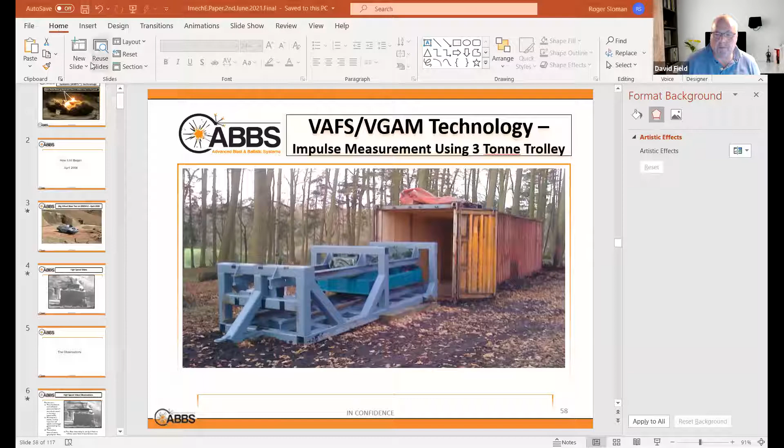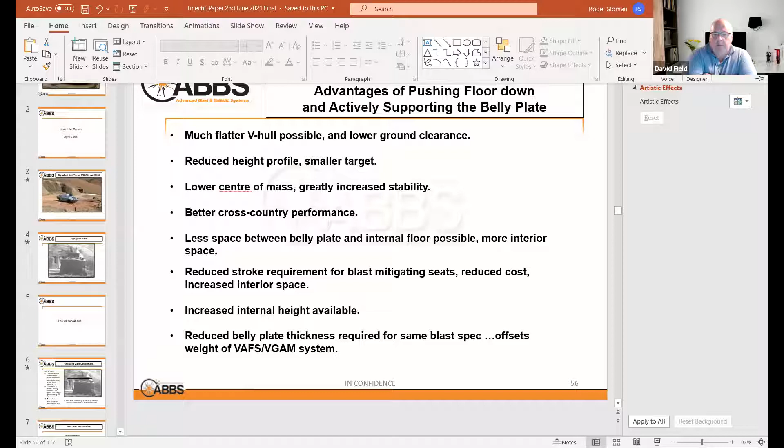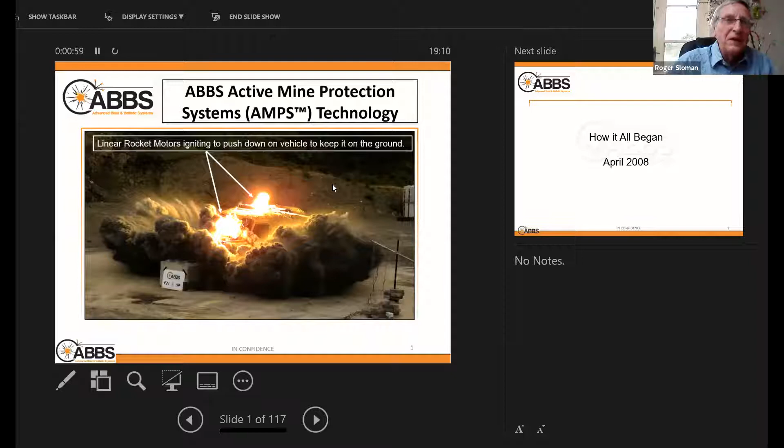This will be about five milliseconds into the event, and the motors are just beginning to fire up to push down on the vehicle. That's a pretty amazing shot with the clarity you get, probably 2000 frames per second, I think.

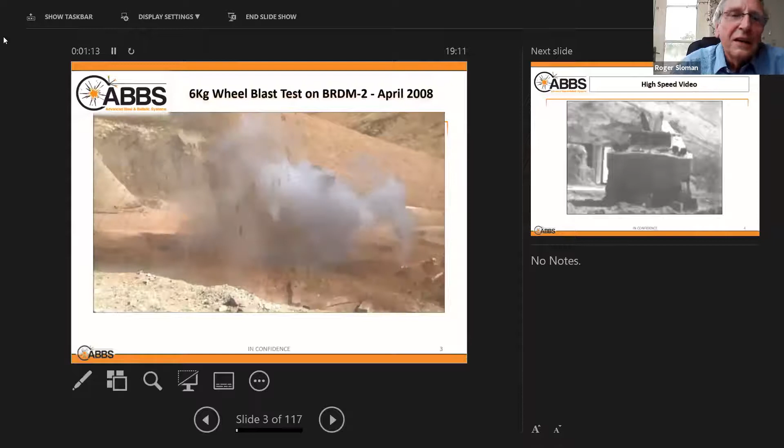So it all began in April 2008 when I was at blast tests on an armoured vehicle, which I can share again. No, they don't want to let me. I'll go back one, and run it again so you can see it. That was the first time I'd ever organised a blast test and seen one.

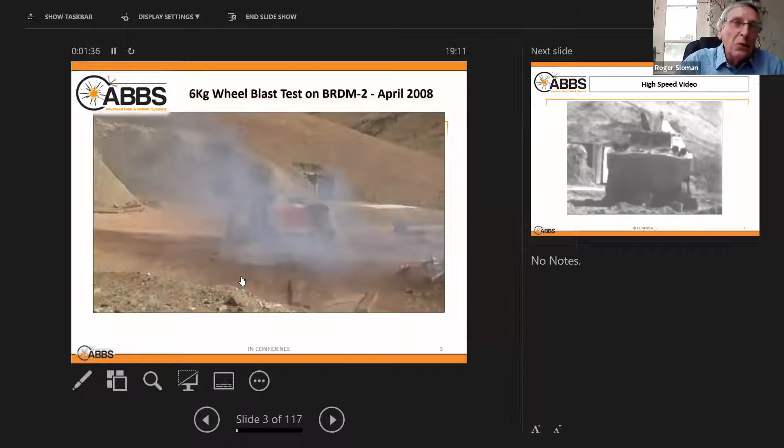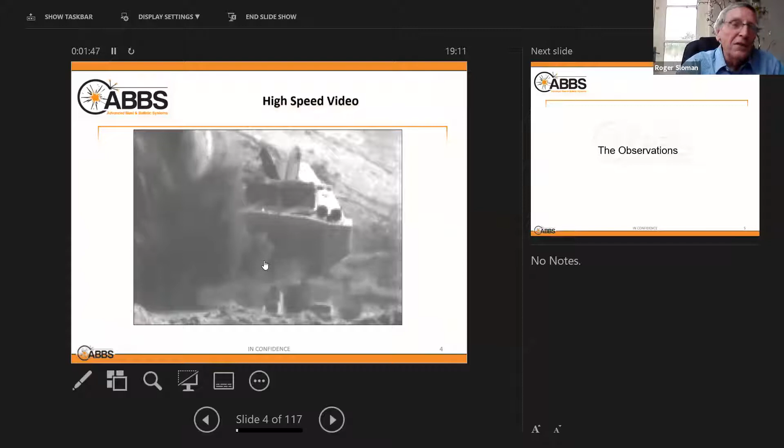When you look at the high-speed video, you can see that the mine goes off and the vehicle doesn't move for a certain period of time. We see that again in the next slide. You see the shock wave from the det cord leading to the mine, and the mine go over the vehicle within a millisecond or two, and the vehicle doesn't move at all.

When I asked the so-called experts in the company I was working for what the cause of the vehicle being blown into the air was, they all said, oh it's the shockwave and reflected pressure, because that's a big peak in the force time curve.

But clearly you see, I'll try and show it again - it's slow in responding for some reason - see the shockwave pass over the vehicle, it definitely hasn't moved. So it cannot be that the shockwave and reflected pressure, which is a big peak in the force time curve, is actually lifting the vehicle.

It's something else. And the obvious conclusion is it comes from the gas generated by the mine and the soil that's thrown up against the vehicle. So I thought, well, that 10 milliseconds is plenty of time to initiate some form of countermeasure.

When I looked at the NATO blast test standards at the time, this was already well known. The section here - I don't know if you can see my cursor, can you? No, you can't, it's annoying.

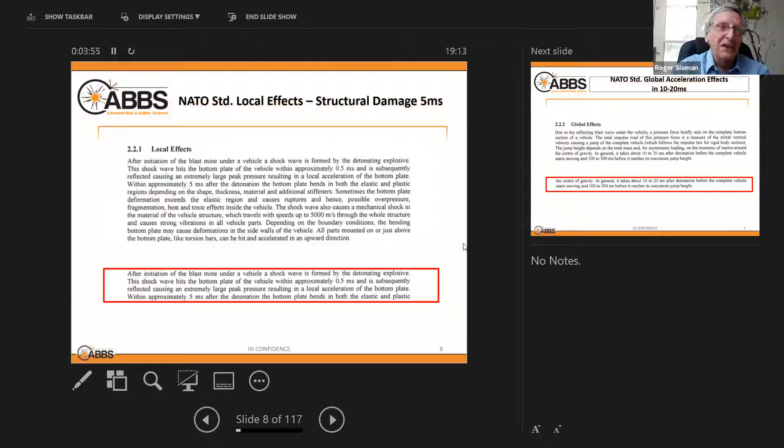All the damage is done in about 5 milliseconds. After that, the gas has gone effectively, and the ejecta has stopped being projected—well, hasn't quite stopped, but the main force has gone. So that's the damage to the vehicle.

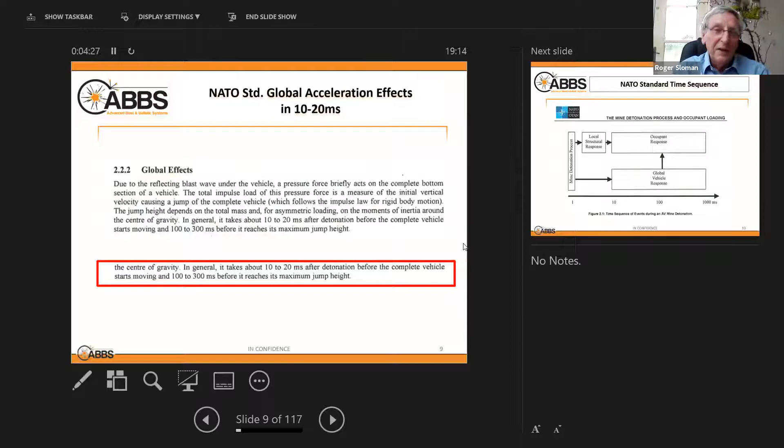Then there's the global acceleration effects, the vehicle being thrown into the air. This red outline, abstracted from the main text, is well recognized: it takes 10 to 20 milliseconds after the mine goes off before the complete vehicle begins to move. That was the observation I made, and I thought it was new, but it wasn't. It was well known, but nobody imagined you could do anything about it.

So this is the sequence of events. The mine goes off, damage is done to the vehicle—this local structural response. Then the global vehicle response starts, the vehicle being thrown into the air at high velocity, a very rapid acceleration from zero to whatever velocity it reaches, which can be 5, 10, 20, even 40 meters per second.

And that creates the occupant response, where the G loadings on the occupants get so severe you get spinal injuries, neck injuries, brain injuries, internal damage, and you can bleed to death. It's not a pleasant scenario. Even if the vehicle isn't penetrated, you can still die or be severely injured from the global acceleration alone.

Understanding what happens is really key to working out what to do about it. Looking at the force-time curve, you've got this initial large peak, the shockwave and reflected pressure that's talked about. Then you've got the forces generated by the gas from the mine and the ejecta being thrown out from the soil. Notice it dribbles along above zero for 20 milliseconds here.

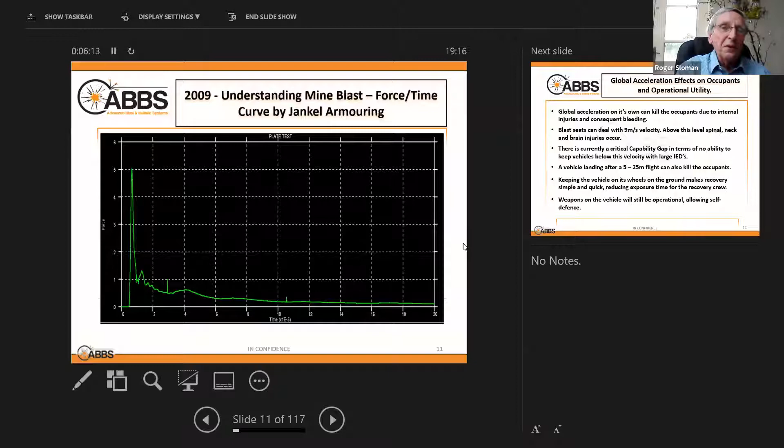In fact that goes on for much, much longer—200, 300 milliseconds at least. That wasn't really recognized when I started looking at this, and it contributes to the total impulse more than people thought. So the global acceleration effects are really important.

They can kill you. Blast seats can only deal with 9 meters per second. This is a critical capability gap—there's no ability to deal with it at the moment in any of the US or NATO armies, or globally indeed.

And it's not just the acceleration upwards—crashing down on the ground is not pleasant either, and that can also severely injure or kill you. In terms of operational utility, keeping the vehicle on its wheels on the ground makes recovery much easier, reducing exposure time for the recovery crew, and the weapons are probably still operational, so you can defend yourself.

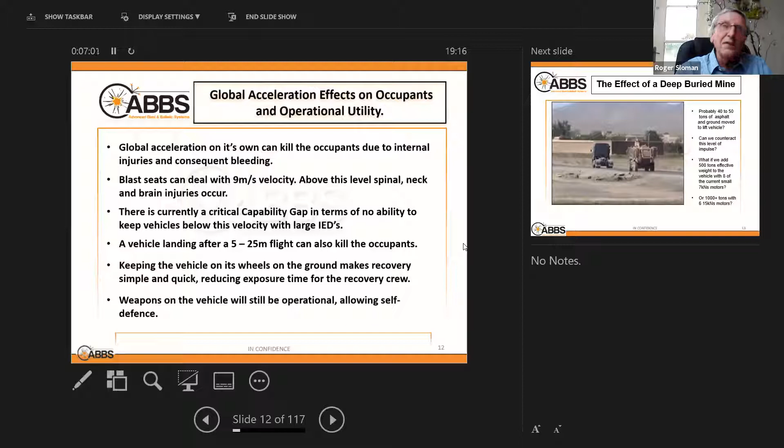This illustrates just what can happen, and it'll run by itself. You've got probably a 15 to 20 ton vehicle there, and it's just thrown aside like a toy. It certainly wouldn't have done the occupants any good. I don't know what the outcome was, but it's a very good example, thanks to the Taliban, of what can happen.

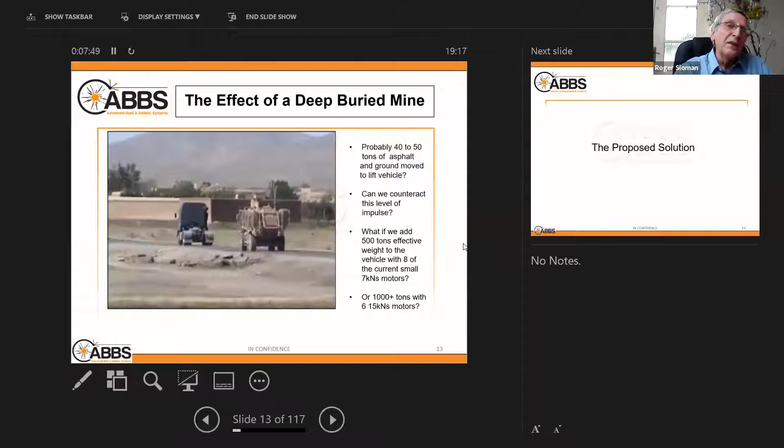So the point is, it looks like there's nothing you can do about that, but we can make that vehicle weigh 500 tons or 1,000 tons, and it certainly would not be thrown in the air like that. There is a potential solution: push down on the vehicle with rocket motors. This is the Vehicle Global Acceleration Mitigation, VGAM.

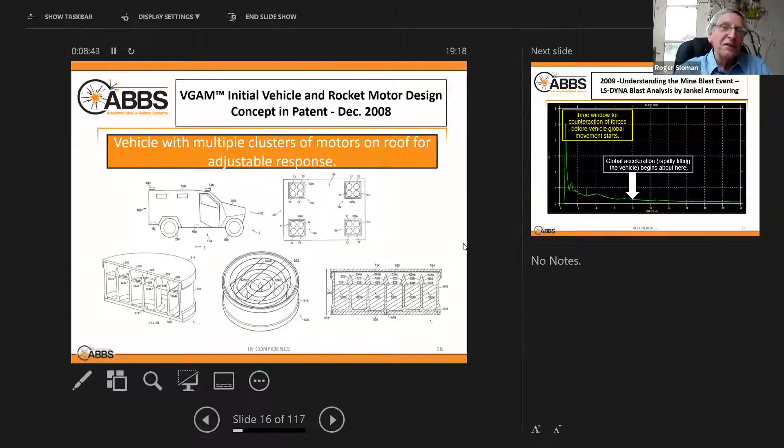The original patent application—these are some of the drawings from it. You see clusters of these motors on the top corners of the vehicle, and this novel rocket motor design, which turned out to be a circular form of the linear rocket motor we ended up with. So yeah, I invented the circular rocket motor. It's quite a shallow bowl with a very large exit area, because you've got to burn a lot of propellant very quickly and get all that gas out through the exit slots—that's what it was designed to do.

This illustrates the time window you have for counteracting the global forces, and that's what you need to do. Thanks to Jankel for that.

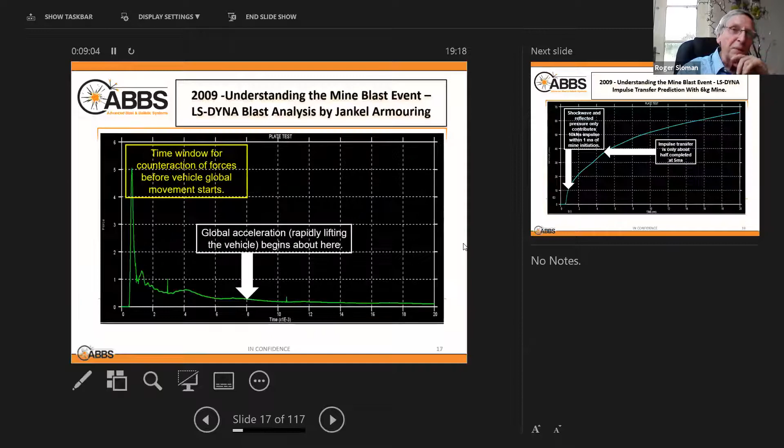Force times time—if you add up all the area under the curve, quite simply, you get the impulse curve. And contrary to what was said in that NATO standard, that the shockwave and reflected pressure drives the vehicle into the air—it doesn't.

It's the total impulse that's transferred over a period of time. Interestingly, at the 1 millisecond time scale, you only get 10 kilonewton seconds delivered, and it's only about half completed by 5 milliseconds.

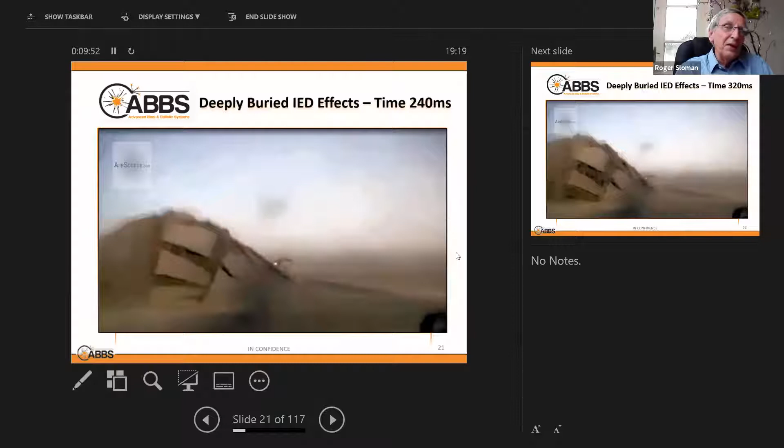This is another example of a deeply buried mine, and you see the effect. There's no gas involved in that, it's just the road surface and the earth being thrown up. This is similar to putting a mine in a culvert underneath a road. You get a very high impulse level generated by this big, massive earth hitting the vehicle, not so much the gas in that case.

So how do you generate huge forces required within 10 milliseconds? There's only two ways of doing it, really in principle only one way: you've got to rapidly accelerate a mass to produce recoil or reaction forces. You could think of electromagnetic devices and rail guns, but forget it, that's not practical for armoured vehicles.

So there's only two ways: ballistic mass ejection, where you explosively accelerate solid or liquid out of a tube or off a surface, or you use a rocket motor and generate gas ejected at high velocity.

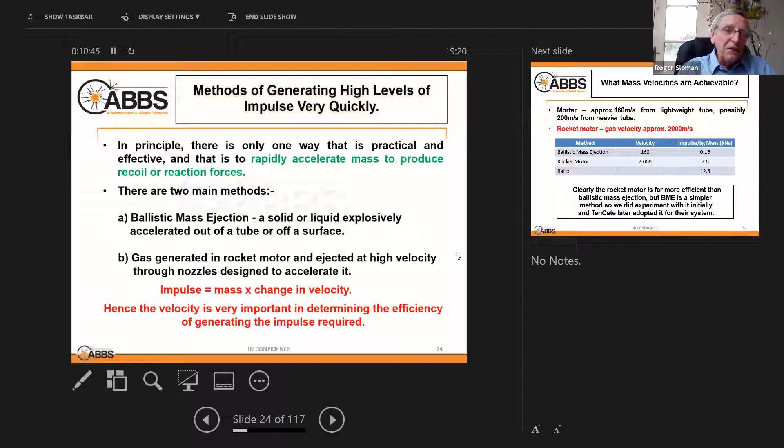Impulse is mass times change in velocity, so velocity is very important in determining the efficiency of making the impulse. For a mortar at 160 meters per second, impulse per kilogram of mass is 0.16 kilonewton seconds. A rocket motor with gas velocity of 2,000 meters per second gives 2 kilonewton seconds. So the ratio is 12.5 times, clearly rocket motors are the way to go.

But ballistic mass ejection initially was simpler. We did experiment with it, and indeed TenCate later adopted it for their system, which is the only competitive system to what we do. So we started by ejecting water from a small steel machined tube.

A kilo of water, 42 grams of propellant. When I measured this, astonishingly, I recorded about 36,000 kilos of thrust load. You note that the motor is ignited by the det cord entering the bottom of the pot.

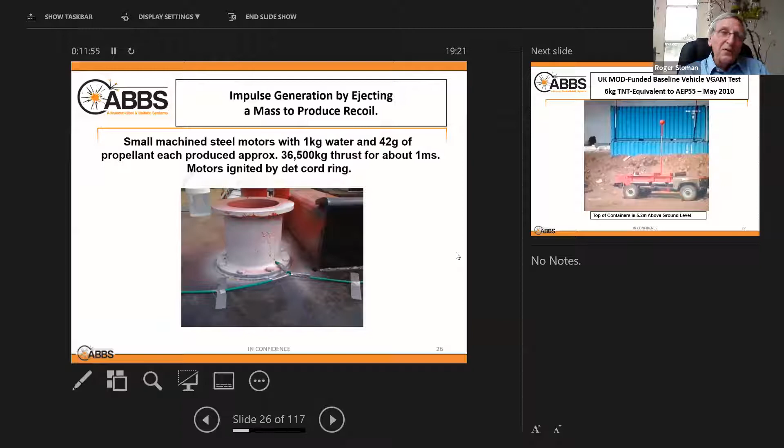And we got some funding. The MOD did not believe that this could work, but they gave me 50,000 to demonstrate it.

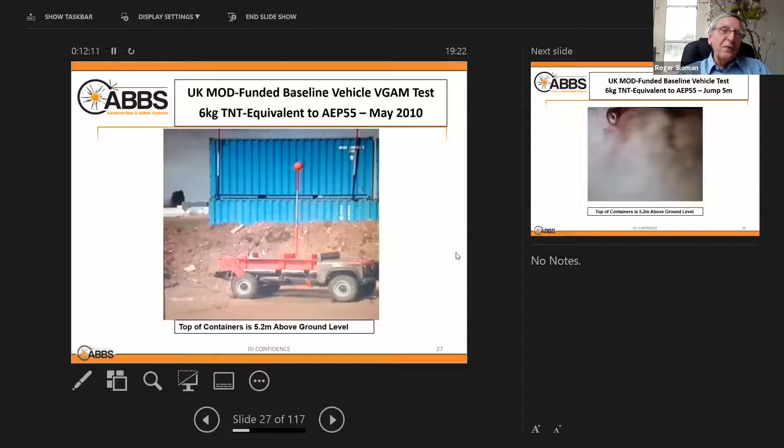This was the baseline test. You note the top of the containers is 5 meters above ground level. This is the baseline test, and that's the result of the baseline test. You still see the top of the container underneath the wheel of the vehicle, about a 5 meter jump of the centre of mass.

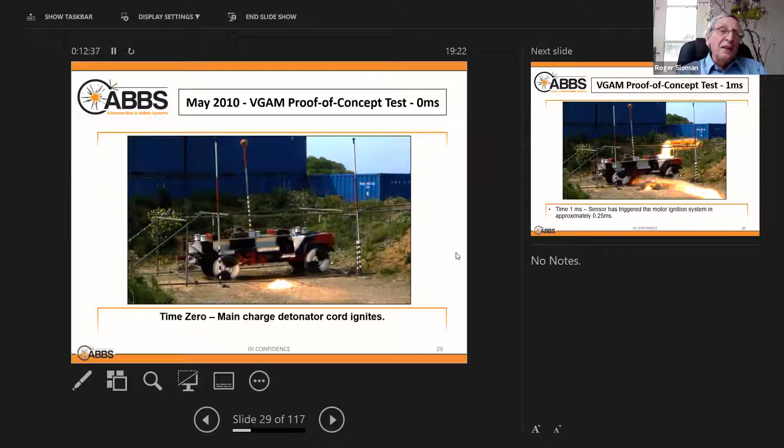Here you can see the setup with the 6 white painted ballistic mass ejection devices, and that's firing up the det cord. The sensors triggered the system at about a quarter millisecond, lighting up the det cord to light up the motors.

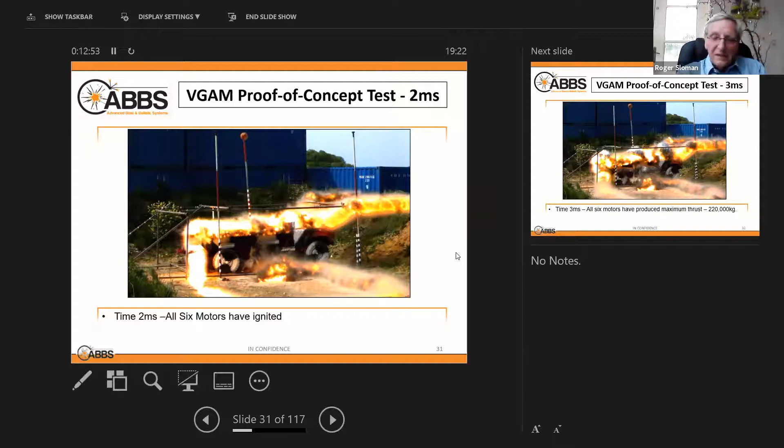And I had 2 ways of doing it, one is reserve, just to make sure that it worked. And here you see the water coming out.

At that point, you've theoretically made that vehicle weigh 220 tons, and you'd expect it to stay on the ground. However, it didn't, because we've still got about a 2 meter jump height. It's well reduced from 5 meters, so a 60% reduction, but we still got a jump.

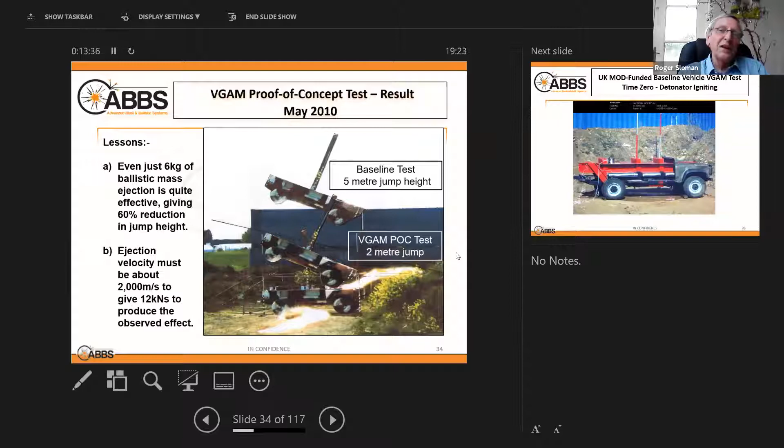The exit velocity of that water, or its initial acceleration up the motors, I think must have been 2,000 meters per second to give 12 kilonewton seconds to produce that observed effect. But the point is that it still jumped. The reason is that when you deliver all the impulse instantaneously at the start, you miss the impulse curve that follows. That's the rationale for that.

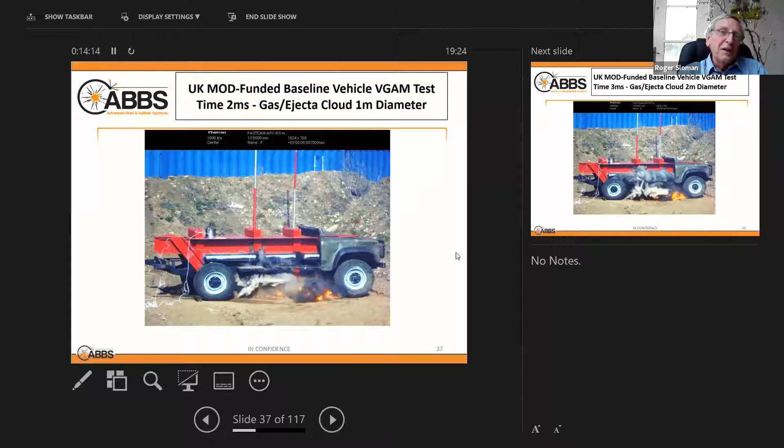Some ejecta. Now, if I just run that back the other way, you can see the intersection of the red and the silver on the column in the center of the vehicle. If you watch that, it starts moving at 2-3 milliseconds.

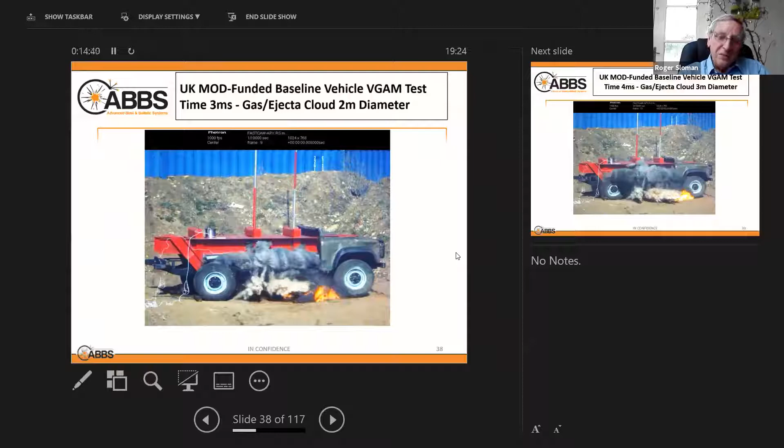And in fact, if you also look at the rear end of the vehicle, the red beams, you see they flip down. So clearly the vehicle is bending in the middle, but if you look at the rear wheel, you can still see that the ejecta is just coming around the edges of the wheel, it's not going under the wheel, the wheel is still on the ground. It's really quite an interesting observation. You can see that at 5 milliseconds, the gas ejecta has got to the end of the vehicle.

The damage process is complete. Vehicle still on the ground.

That's really quite interesting. So the observations from that, it takes 5 milliseconds to get to the end of the vehicle, so about 1 meter per millisecond.

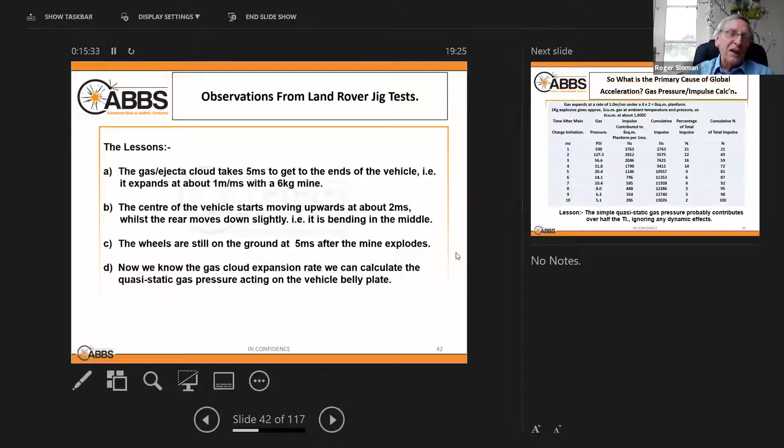The gas cloud expands, center of the vehicle moves up, bends, and we now know the gas cloud expansion rate, so we can calculate the quasi-static gas pressure acting on the vehicle belly plate underneath the vehicle.

I'm not a mathematician, so I do it very simply by taking 1 millisecond steps, a simplistic analysis of the quasi-static gas pressure underneath the vehicle. It drops very rapidly from 500 psi at 1 millisecond to 127 at 2, 56 at 3, right down to 10 psi at 7 milliseconds.

So really it's all done pretty much in 4 or 5 milliseconds. 80% is done in 5 milliseconds. And you can calculate the impulse and you get to a total of 13 kilonewton seconds.

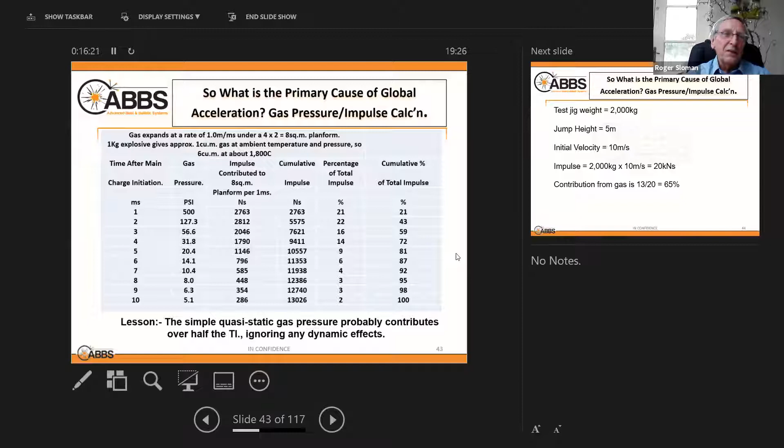So that's quite interesting. When you think what the primary cause of the acceleration is, you've got the jig weight, the jump height, the initial velocity to get to that height, 5 meters for the impulse, and the contribution of the gas. 65% of the contribution to impulse is from the gas, just the quasi-static pressure of the gas.

When I ran that past people I visited, like British Aerospace Systems, GDLS, Renault, the TNO research organisation in Holland, I asked them what their view was of the ratio of the effect. They came up with 60% for the gas as well, so that was quite pleasing.

There's a frequent perception that holding the vehicle down against a blast will result in more damage. Complete load of rubbish. The evidence from the two tests, the baseline and the VGAM one, shows there's very little difference between the deformation of the belly plate in those two.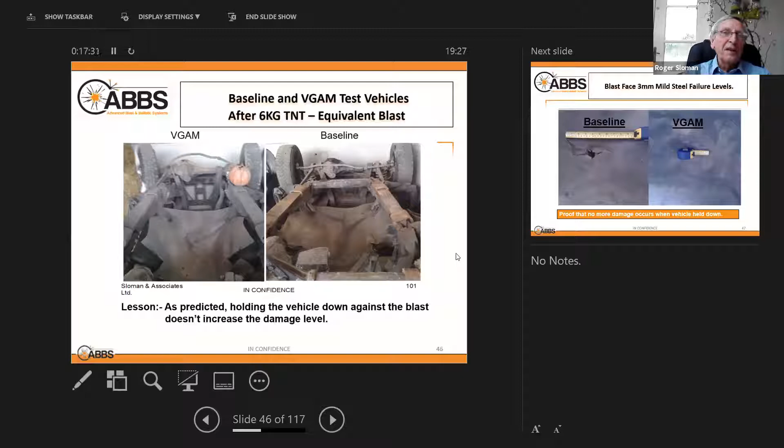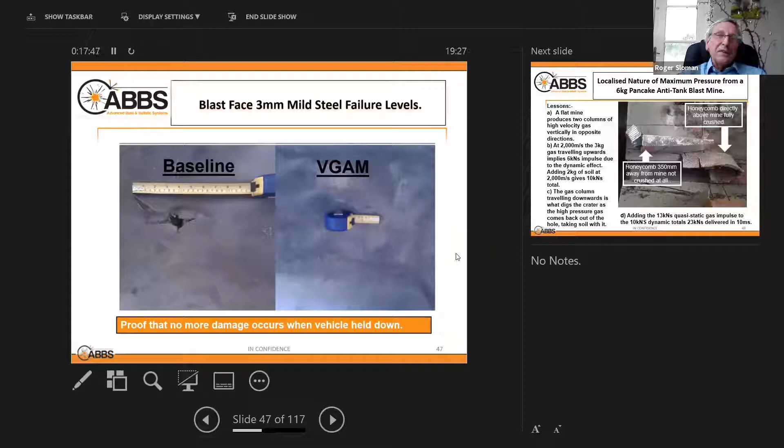In fact, there was a split in the baseline one. There was only 3mm steel on the sandwich section I used underneath, whereas the VGAM one has just got a tiny crack. So that was quite interesting that it worked like that.

The other thing is the honeycomb within the sandwich structure, directly above the mine, is completely crushed. A foot away, it's not crushed at all, illustrating beautifully that with a flat anti-tank mine, you get 2 columns of gas, high velocity gas, going vertically in opposite directions.

And you think about the impulse that's generating, 3 kilos going up, 2,000 meters per second, 6 kilonewton seconds. Due to the dynamic effect, add a bit of soil and it gives you 10 kilonewton seconds in total, which happens to be what the LS-DYNA analysis said as well.

So that's simple logic. Whether it's right or not, I'm not quite sure, but it seems to be. The gas going down digs the crater out, so high pressure gas comes out.

So adding the quasi-static gas pressure, quasi-static impulse, you get 23 kilonewton seconds, which is what was required to push that vehicle 5 meters in the air.

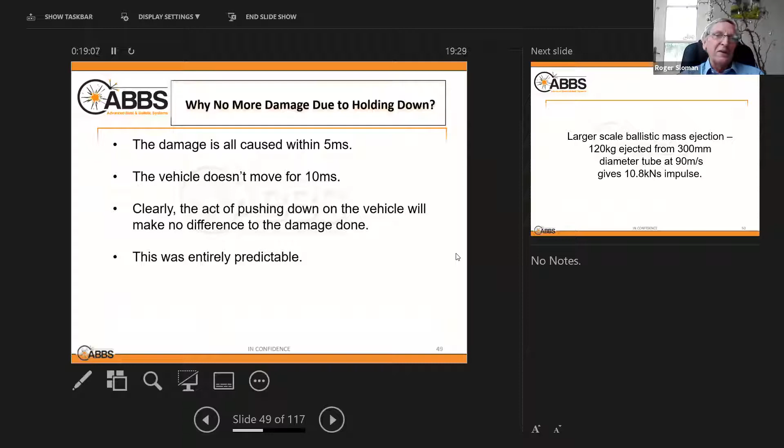So why is no more damage done by holding down? Because it's all caused within 5 milliseconds. The vehicle doesn't move for 10, so clearly it's not going to do any more damage. And that was army people who suggested it might do more damage quite frequently.

So we did then look at large scale ballistic mass ejection. We ended up with 120 kilos of mass being ejected from a foot diameter tube at 90 meters per second, giving nearly 11 kilonewton seconds worth of impulse.

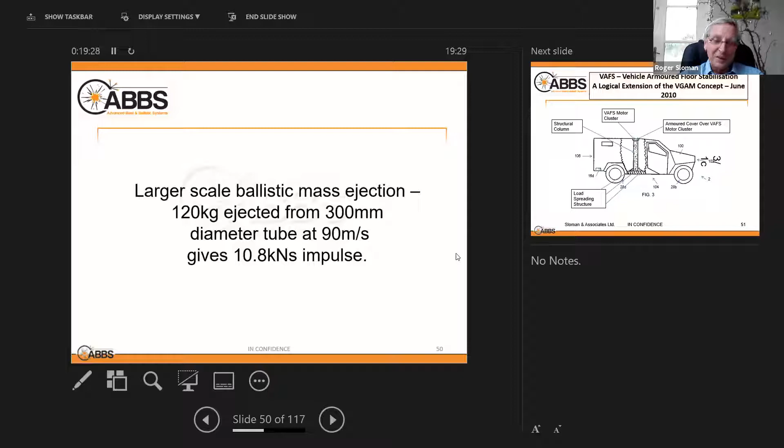It's worth just looking at how we did that. There's another patent application that went in using a column to bridge between the roof and the floor, put motors inside there, and then you're pushing down on the floor as well, which stabilizes the floor against the mine blast.

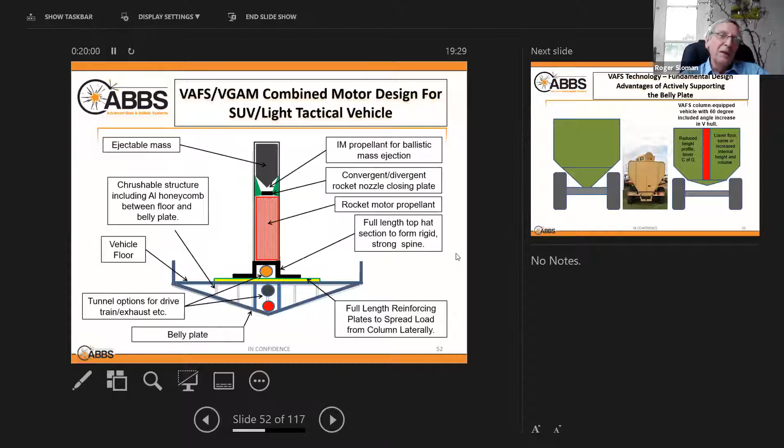So I came up with various designs incorporating both the ballistic mass ejection and the rocket motor within the column. That would all work beautifully in principle, and that would allow you to get away from the horrible V-shaped hulls.

When I drew that first thing on the left, I thought I'd made the angle too steep, and then the Foxhound next door to it was even steeper. If you have a column in the middle to push down, you could make it a lot flatter, a lot more central, and a lot more room inside.

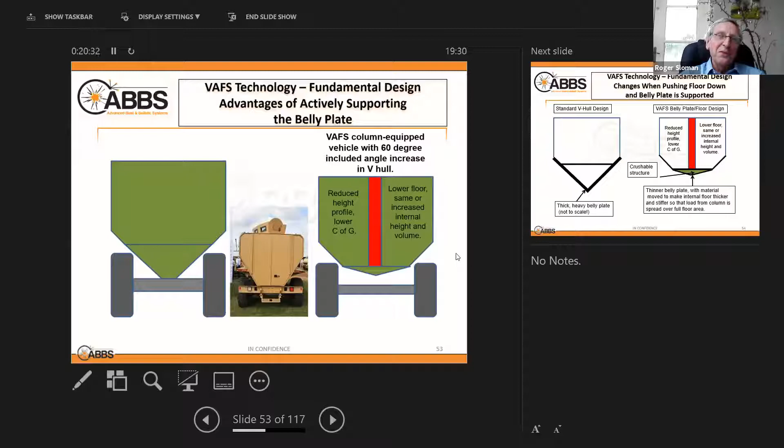And that's just repeating the same thing really. I came up with designs where you could put the exit holes of columns in the roof of the vehicle, so you could put tubes down to the belly plate, going through down to the belly plate or the floor or the secondary floor, and have side doors.

But lo and behold, well, yeah, so there's all these fundamental potential advantages that you could think of.

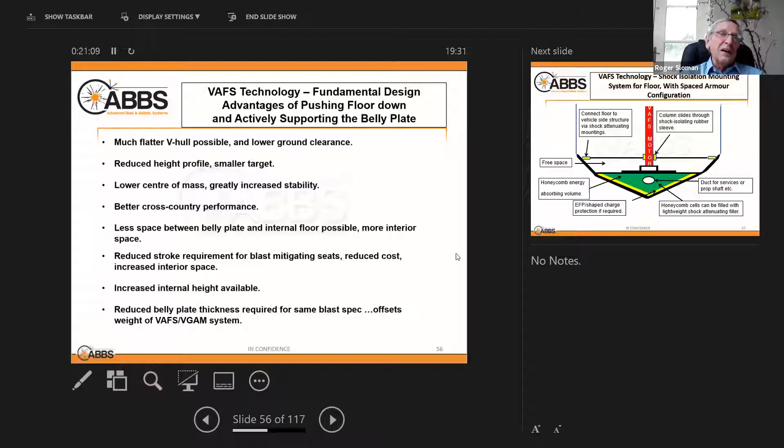Unfortunately, the military do not like the tubes going through the vehicles. They do not like side doors, because when you draw up to dismount your troops, you face the enemy, so side-mounted doors are not a good idea apparently. You want a rear door. Furthermore, they don't like explosive devices in the vehicle, even though they carry a lot of explosive devices. So there's lots of reasons why they didn't like this.

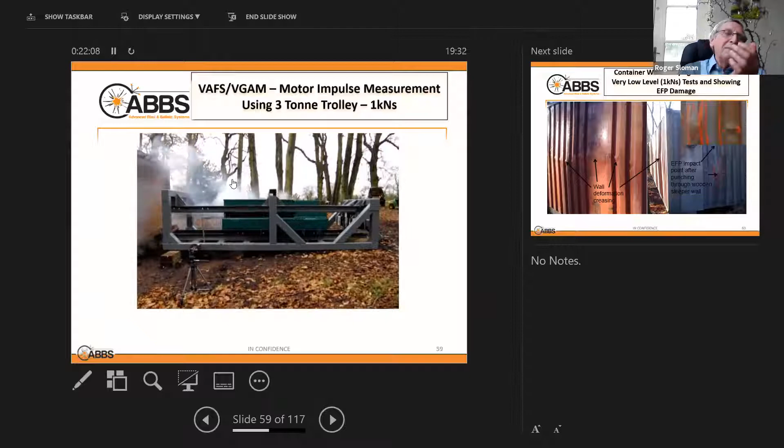I'll go back and see if we can run that again. Don't watch the trolley, watch the porta cabin. Watch the end of the porta cabin.

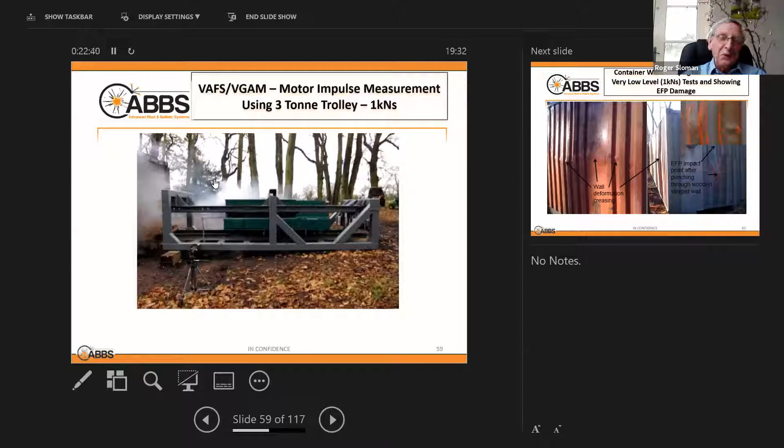Now, I don't know if you saw that, but the porta cabin actually jumped back 3 inches. This is a 40-foot container on the ground, not on rails, and it jumped back 3 inches. After 3 or 4 tests, the walls were suffering, being blown out, and the EFP-type device we were kicking out of the tube was going straight through the wooden sleepers at the back end of the porta cabin, so we thought we'd better bury it.

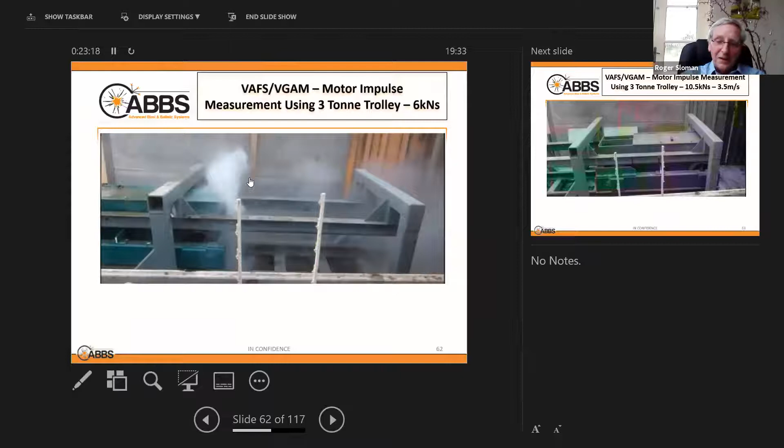So we buried it and continued testing. That's 6 kilonewton seconds being generated, and that's 10.5 - you blink and you miss it. I think I might have a slow motion version of that. Yeah, you just about see it start to move.

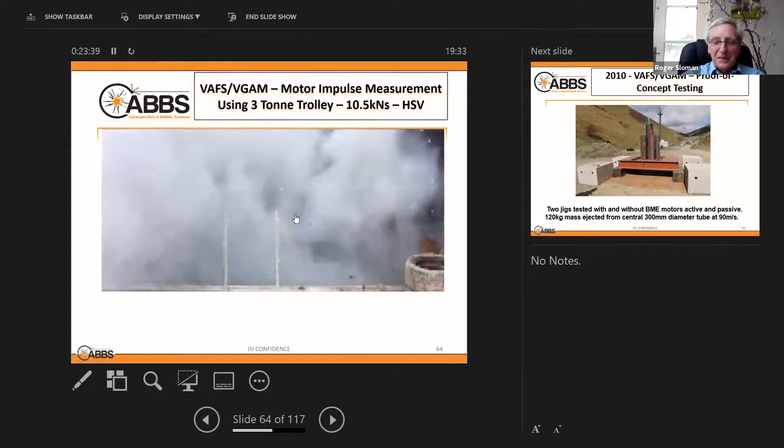We did quite a lot of work on it, and we got some more funding from the MOD in the UK to do a series of tests. Here we've got one big tube in the middle to deal with the main blast, and then 6 smaller tubes around the outside to deal with the longer duration delivery of the impulse from the mine. That was all set up and agreed with the MOD guy, DSTL, who was overseeing the project.

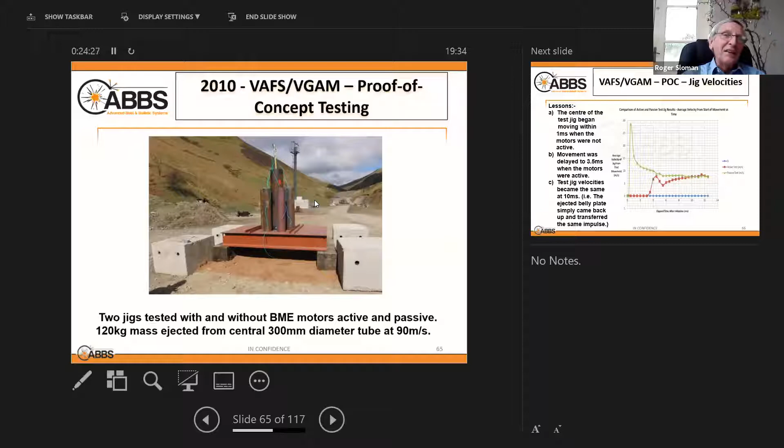When we got to the range, he said, actually, I want you to fire them all off at once rather than in sequence, which was a bit of a pity. However, we did that, and what happened - we actually blew the belly plate off the test rig, completely blew it off. But it was interesting information.

The velocity acquired by the jig when the motors were not active - immediately it starts to move. When we've got the motors active, you see the movement is delayed for 3.5 milliseconds, but then the belly plate that's been blown off comes back up, collects the top part of the jig, and it reaches the same velocity, exactly the same velocity as the one without the motors firing.

So it was really quite an interesting thing, and as a result of that I decided that we needed to put the linear rocket motors on the belly plate. One of the options was to blow the belly plate off to protect the vehicle, squash the blast effectively. And this suggested that you needed the rocket motors to be fired for a period of time. So that was one element of the patent application I put in.

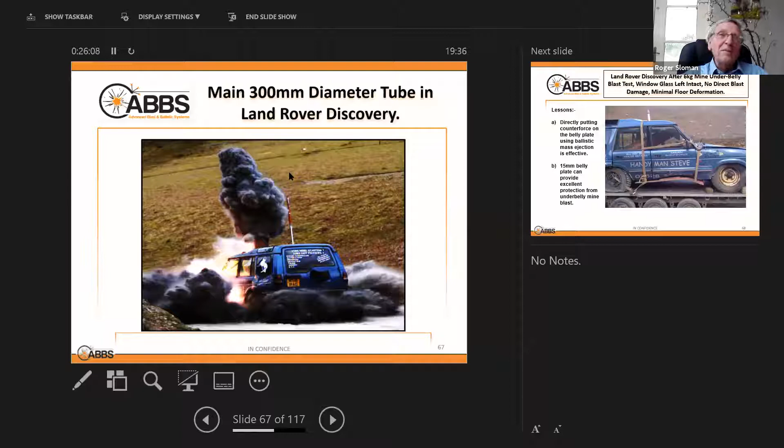I decided, though, while we were down there, we had these motors on this test tube, we'd take an old Land Rover Discovery, stick the big motor in the middle with a belly plate underneath it - very simple belly plate, 15mm mild steel - put a tube in it and see what happens. Lo and behold, we got a really impressive result: that's had 6 kilos under it. It's completely standard apart from the ballistic mass ejection tube and the belly plate.

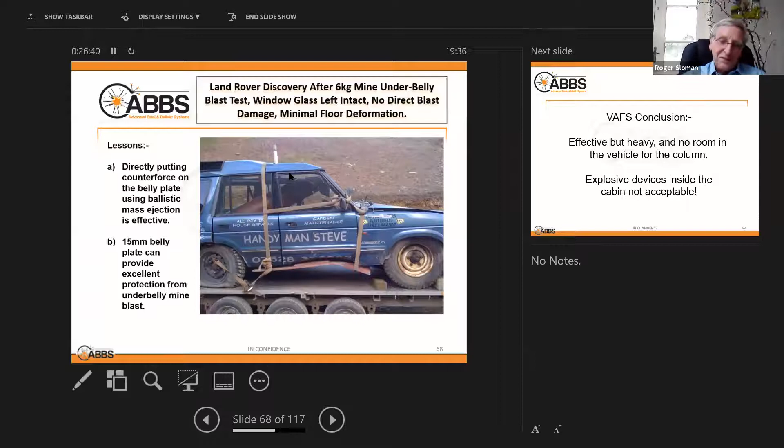You see there's very little damage. The belly plate is distorted a little, the glass is intact in the vehicle, and very little floor deformation. That's really quite an impressive result for such a crude test. Still didn't convince anybody to put the tube in their vehicle, however. So it was effective, it's heavy, and there's no room in the vehicle for explosive devices - they don't like them inside the vehicle.

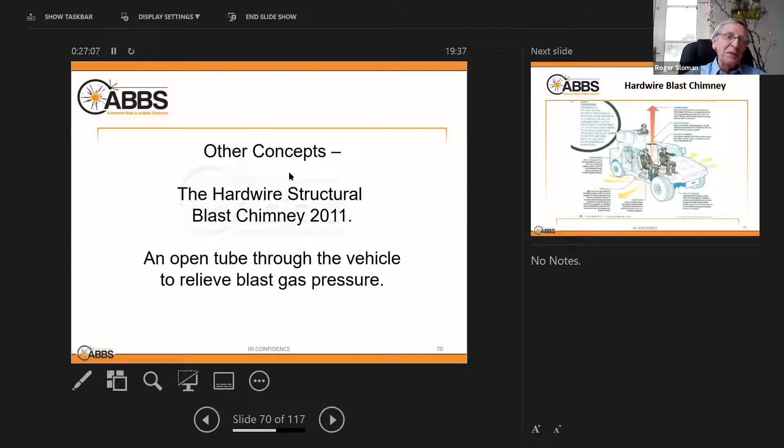There were other concepts that were very similar, and the hardwire structural blast chimney is another slightly dumb answer to the problem. It's an open tube through the vehicle to relieve the blast gas pressure, as shown in the drawing, but that's only fine if the mine happens to be directly underneath the hole.

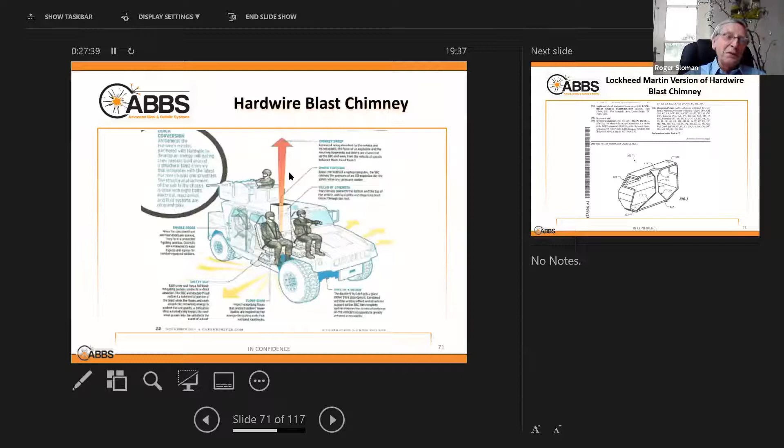Really it's not going to take too high a percentage of the gas generated out. The vast majority still goes out the sides of the vehicle, creating impulse that drives the vehicle. Even so, some people at Lockheed Martin patented an even larger collection funnel, which would trap the gas for even longer and create even more impulse as it struggles out through the narrow tube. Utterly crazy, but there you go, that's what you get sometimes.

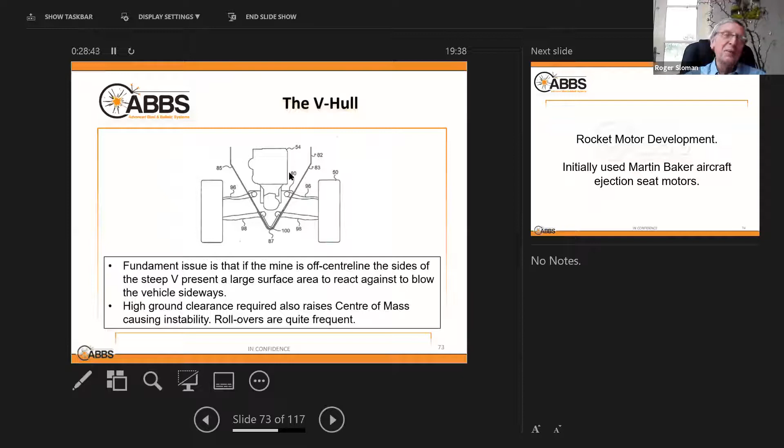So the proper system, rocket motor development - we initially used Martin Baker aircraft ejection seat motors.

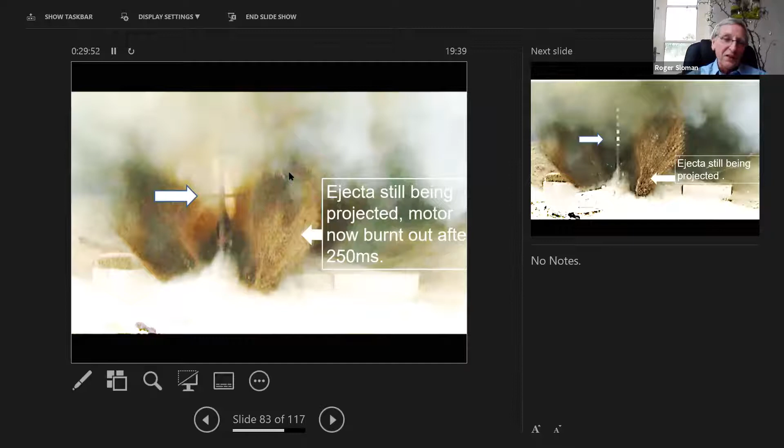The really interesting thing is that the rocket motor is now burnt out at 250 milliseconds, yet look at the ejecta still flying out of the hole - which is why I said the dribbling along above zero goes on for a long time. That must continue for at least a quarter of a second, as illustrated by that picture. Interesting observation - it's all about observation.

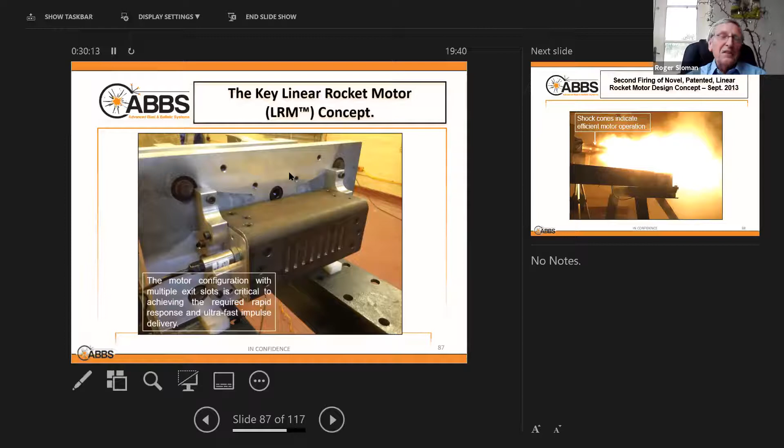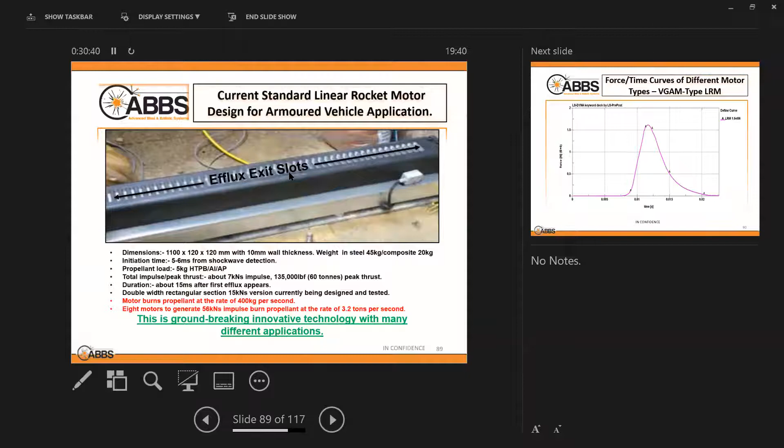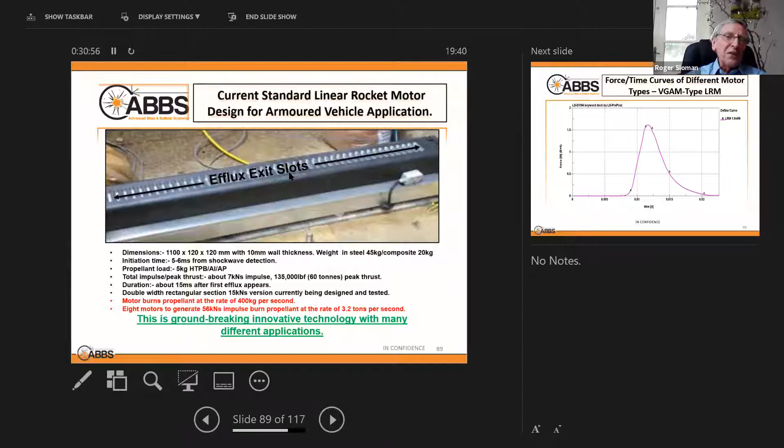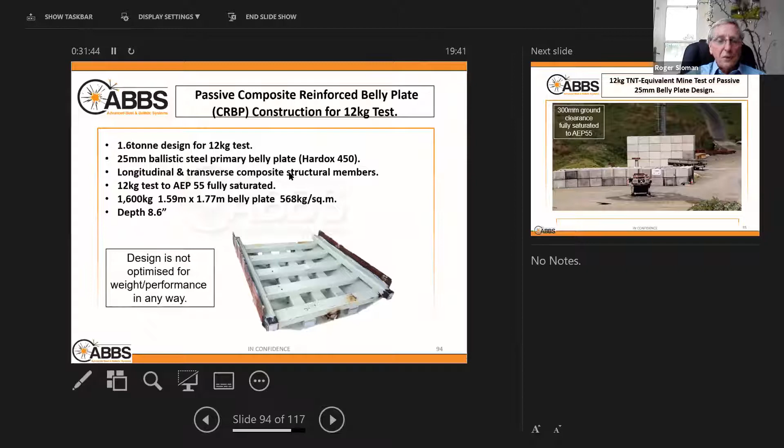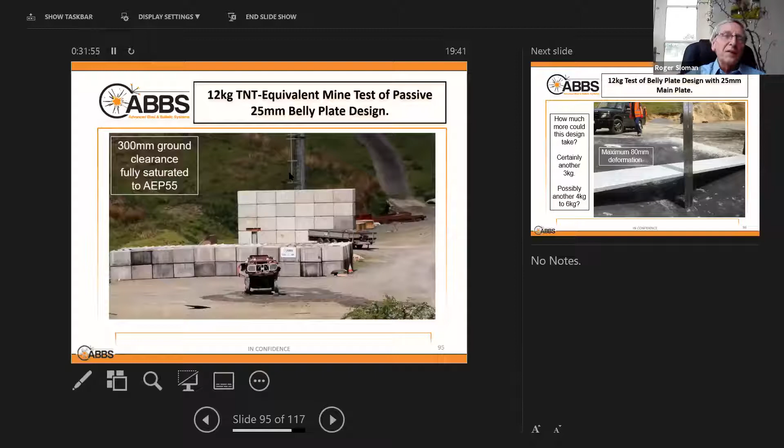That was 12 kilos at 300mm standoff, and we got 80mm of deformation from that. So it could certainly take more - possibly up to 20 kilos, certainly 15, probably 20 kilos. What we're trying to demonstrate is that you could design a belly plate for a vehicle structure that could take 20 kilos, and if you push down on it with the motors, you can keep it on the ground as well.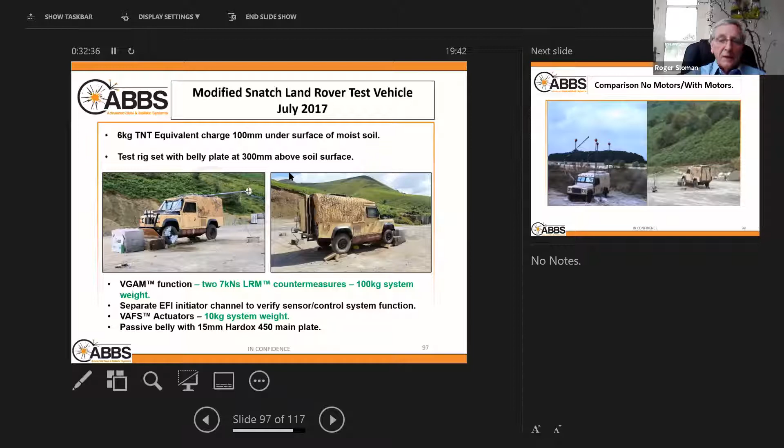So we then did a more practical test on the Snatch Land Rover - 6 kilos, 2 motors, and there was an active floor system as well. The result: mine goes off, motors fire, and the vehicle stays on the ground. Hopefully this will play - yes, it does.

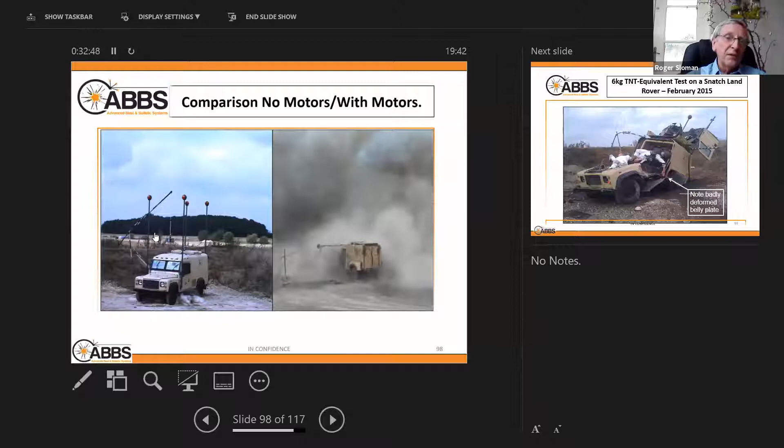This is the comparison without any motors. Pretty dire - it goes about 6 meters in the air, splits the vehicle in half, and the end result is that everybody would have died pretty much. Note that the belly plate is very badly deformed. That's a key issue.

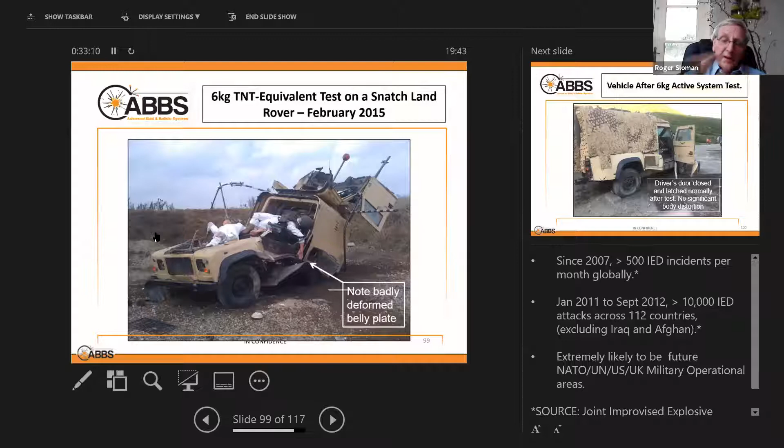So this is the one after the 6 kilo active system test. No deformation in the vehicle at all. The belly plate took it all, and the vehicle stayed essentially on the ground. We just put a 30mm dent in the belly plate, and the device we had in the driver's seat showed there was no injury. The threshold for injury, you can just see, is 17.7 on that index.

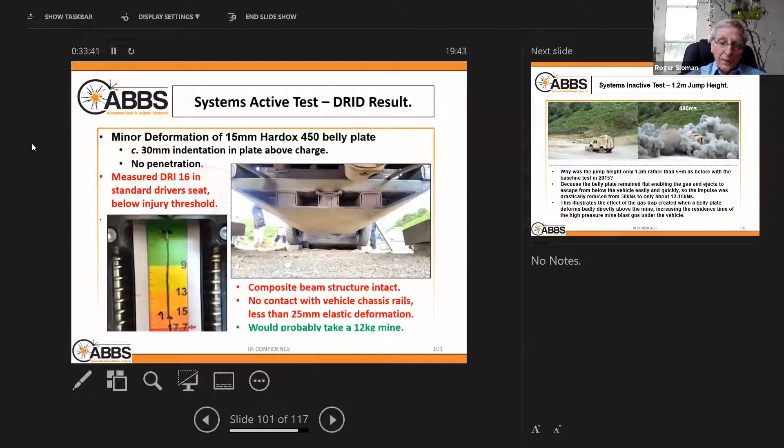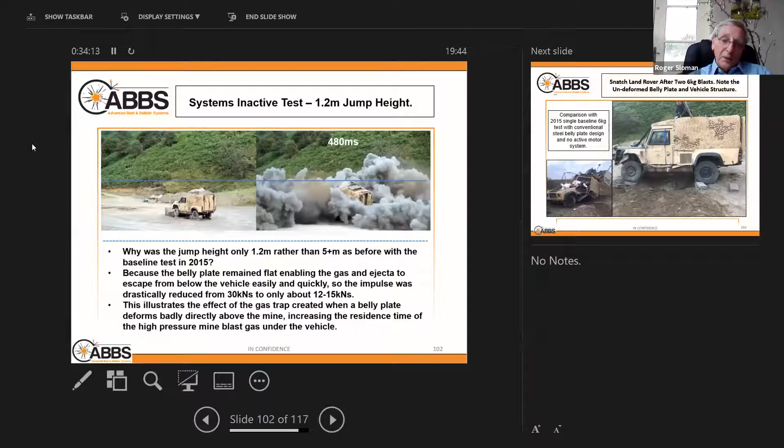That was very satisfactory. When we did the second blast test on it without the rocket motors firing, it got a jump height of only about 1.2 meters, not the 5 meters we saw from the previous baseline test. So quite surprised about that. We think the flat belly plate staying flat enabled the gas to get away quickly from underneath the vehicle, reducing the impulse transfer. We think that's an interesting observation, which we will continue to investigate.

And that's it after two 6 kilo mines underneath it - still intact, still undeformed, just bits of damage to the body. We had a hybrid 3 dummy, which you have to use to demonstrate whether there's any injuries to the occupants. This was sat in a Jankel blast seat, and all the numbers are way below the threshold, including the tibia numbers at the bottom.

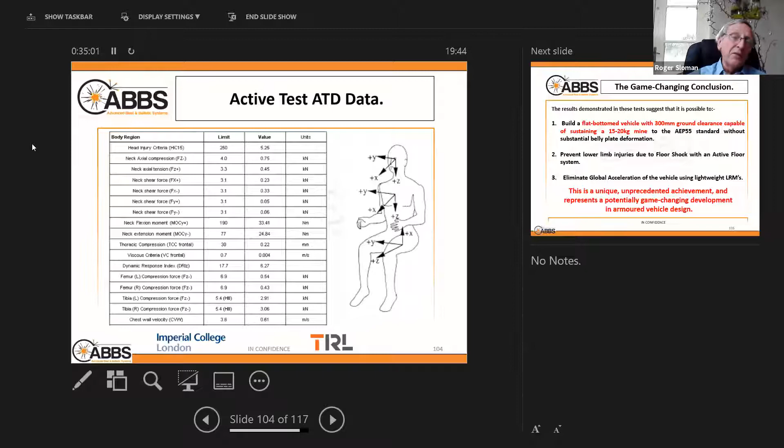We had the dummy's feet on the floor, which is not normal - you don't do that, otherwise you break the dummy. We had an active floor system that pulled the floor down, or pushed the floor down, when the mine went off, and that removed the floor from under the dummy's feet and saved it from injury.

So we demonstrated that it's pretty game changing. You can build a flat bottom vehicle, no V-hull, with 300mm ground clearance, capable of sustaining a 15, 20 kilo mine without significant deformation. It's pretty heavy and it's pretty thick, but you can do it. You don't have to have any limb injuries due to floor shock, and you can eliminate the global acceleration using the LRMs - and that has been available to the industry for some time, if they cared to take any notice.

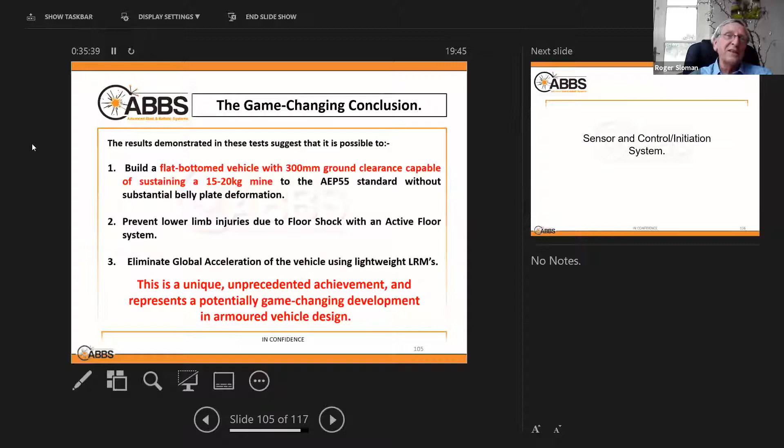So, sensor control initiation system - you don't know what size of mine you're going to hit. It could be anything from an anti-personnel mine to large IEDs with very different force time curves as well. You don't want to react in full to an anti-personnel mine or a small anti-vehicle or a decoy mine, because the first thing people say is, oh, they'll set a decoy to set the system off and then another mine underneath to do the damage.

Well, that is not really practical. Vehicles are usually traveling - you've got to be pretty clever to set a decoy that's going to work and do that. But we don't react to a low level, so the decoy almost certainly will not trigger our system. And the system deals with it.

It's because of the force time curve of the mine blast impulse transfer - you don't want to deliver all the impulse from the motors too quickly, or you'll miss it, and you'll still get global acceleration. So the rocket motors do go on for a little bit longer.

Sensing is interesting. We use pressure sensing to detect the shock wave, and we then measure the deformation of the belly plate - I'm not going to say how we do that, but it's very simple. Then it can command either no fire, part fire, or full fire. So we have an adjustable response according to the size of the mine.

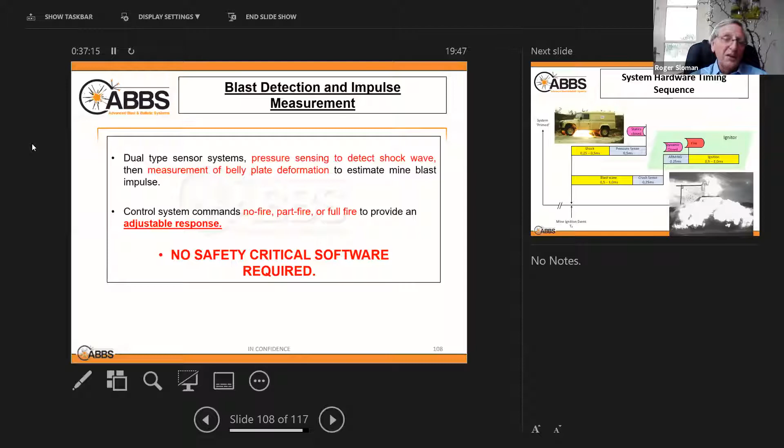Very importantly, there's no safety critical software involved in that process, because people just do not like safety critical software. So, system hardware timing sequence: the shock is at a quarter half a millisecond, blast wave follows at 1 millisecond.

We sense the pressure within a millisecond, we sense the crush within 1.25. The system leaps into action, it arms, it runs in safe mode, so it cannot go off until we've received those two different sensor signals. So it's a completely safe system - it cannot go off accidentally. It can only go off if there is an explosion underneath the vehicle that causes sufficient deformation of the belly plate to kick the vehicle into the air.

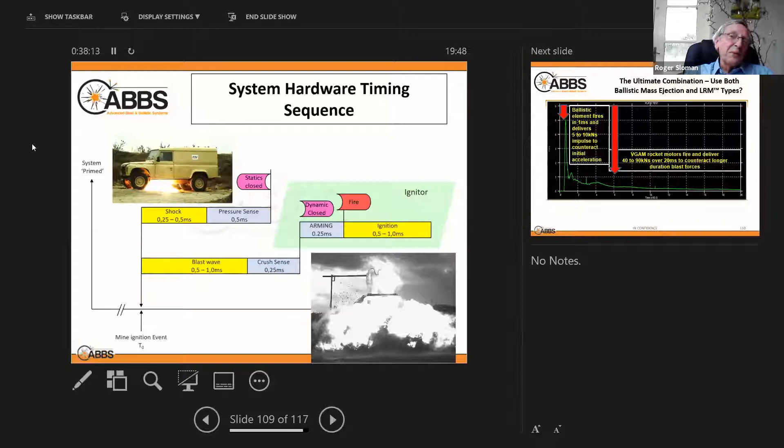So it's a brilliant system, actually. It's very simple, and it does the job extremely well. And then you get the motors firing up a couple of milliseconds afterwards. So there is some discussion from certain places that you need an instant reaction within 1 millisecond. If you do, that is a ballistic element that you add to the system. It's not yet clear why you should need that. It doesn't quite stack up with our understanding of the blast event, the reaction of the vehicle and the blast seats, but there you go. Certain people do think that's true. And then you get the rocket motors to deal with the longer term impulse transfer.

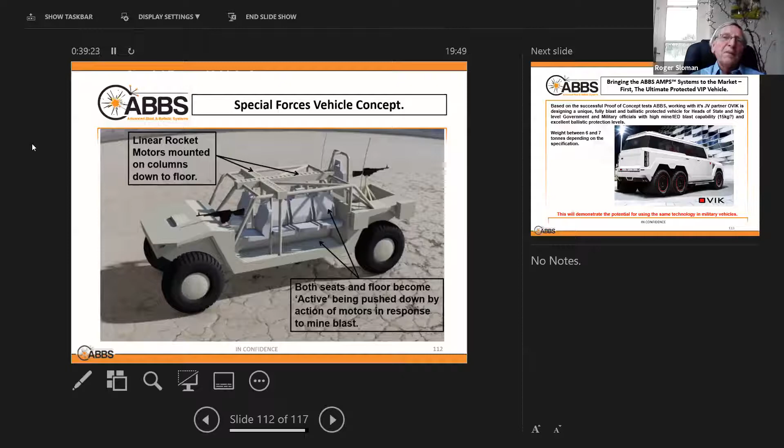So a couple of normal designs, you can easily incorporate the linear rocket motors into a special forces vehicle concept. Tubes taking the force down to the floor to stop the floor being deformed. It's a very neat design. Sideways seat, so you can fire your weapons sideways. You get 9 guys on the vehicle, which was the American requirement for a squad vehicle. Again, nobody's picked up on it yet, but there you go, keep trying.

And a civilian vehicle which would match any armored vehicle in its protection status, combining both ballistic protection and the VGAM system and active floor and everything else. You could do that at weight between 6 or 7 tons, but it can be done. And we thought that would work for heads of state and so on. Still, nobody's put their hands up yet on that one either.

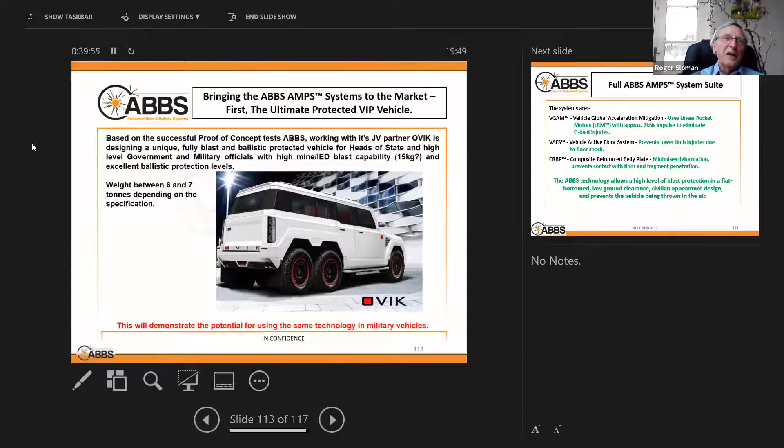Keep working at it. So these are the systems: stop the global acceleration, stop floor shock injuries, stop the belly plate deforming and intruding into the cabin compartment, and you can have a high level of blast protection in a flat bottomed, no V, low ground clearance, civilian appearance design.

So that is it. Bringing this up to date, we're developing a belly plate to take 4 kilos under a Toyota Hilux, and we're pretty sure we can do 4 kilos, but we're doing a test on July the 15th to prove that. Lots of potential applications for that.